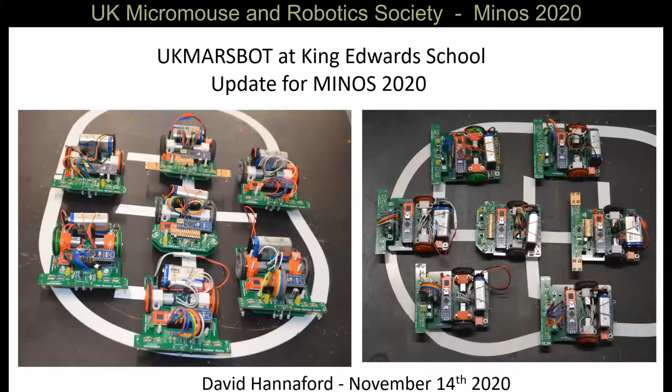So this is basically a quick update on what we've been doing at King Edwards School in Stratford. So as you can see from the front slide, we've been building lots of UKMARSBOTs, which is great news.

We met every Tuesday after school for an hour and a half with 10 pupils from Year 8 building line followers. And we had a couple of helpers from Year 11 who in previous years had some Arduino line following experience as well, with previous robot clubs I'd run there.

So just over a year ago, we started the idea of building UKMARSBOTs with the Robot Club. And then between then and December, we were doing both hardware builds and also in parallel getting people used to the Arduinos, because most of them had never done any Arduino programming before.

From January through to March was improving the line following code and testing and trying to improve it. But we also have a 5-meter drag race strip. So we spent quite a bit of time doing drag race as well, because I found that quite good fun. Then, as we all know, middle of March, lockdown came. So nothing happened basically through the whole of the summer.

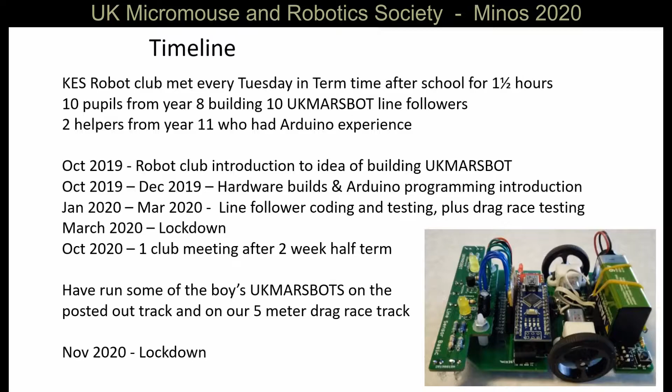We were working in the design and technology lab, where we had a laser cutter and some 3D printers, and we used the 3D printers to make the wheels and the rear skids. We had 5 soldering iron stations, but 10 people building robots. So in each session, we had 5 people building robots and 5 people getting used to Arduino, and then halfway through, we'd swap over. I think they all really enjoyed the soldering, as it was new to most of them.

We had 10 desktop PCs in the DT lab, and we managed to get Arduino loaded onto them, including the CH340 driver that we needed for the Arduino Nanos. And I also set up a website with the build instructions, some Arduino advice, and some little bits of sample code.

In terms of the builds, we used the Pimoroni 20-to-1 geared motors, which basically gave us more top speed than they could control. So we didn't actually need anything faster than that. We didn't put encoders on because it was going to be complicated, and we thought we'd get the basics sorted first, and it was expense as well. We were using visible light sensors for safety, and we used O-rings on the tires for the printed wheels. Okay.

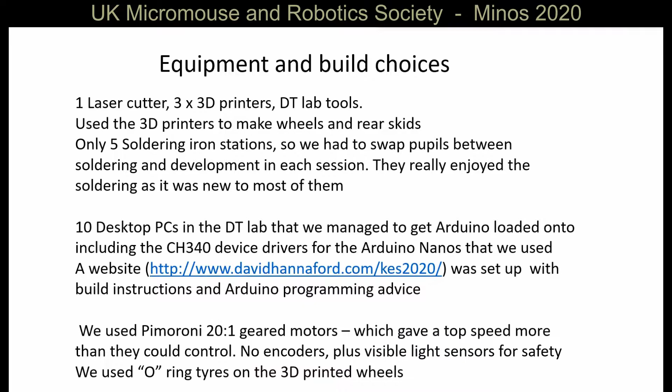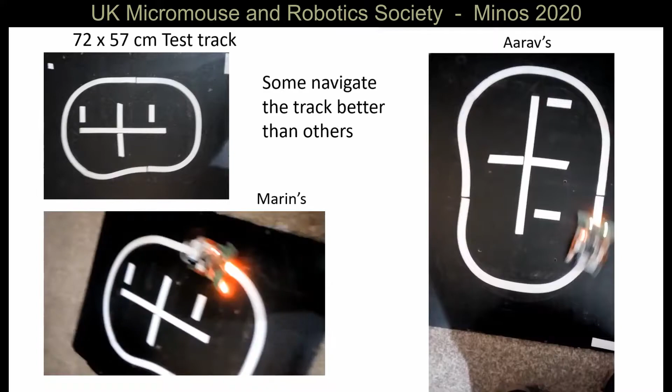We didn't have a big track to try things out at the school. We had some blackboards that we put some white tape on, and the boys liked ripping the tape off and putting different tracks down. But basically, we used a small 57 by 72 centimeter track with just a circle and some lines on it, just to try things out. Some went around that reasonably well once they'd been built, and others not quite so well, which is about what we'd expect.

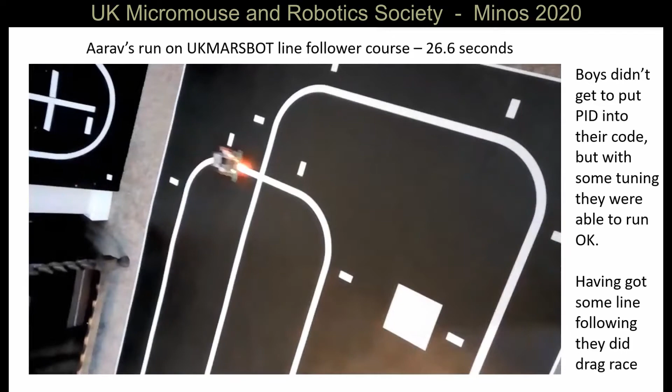Once we got them running on that, we did go on to do stuff with drag race. But here's a shot of one of the better school line following robots running on the track that Duncan has sent out. And as we can see, it follows the line nicely. It does the crossovers pretty well, and even the tight bends, it's following the track round pretty well.

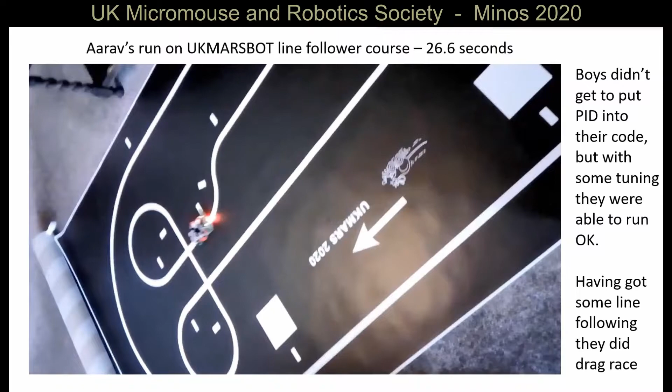It didn't do full PID control. I think there might have been a little bit of proportional control in this one, but that was about it. But in spite of that, the best ones, with a bit of tuning on the speed and not trying to run too fast, got around the track pretty well.

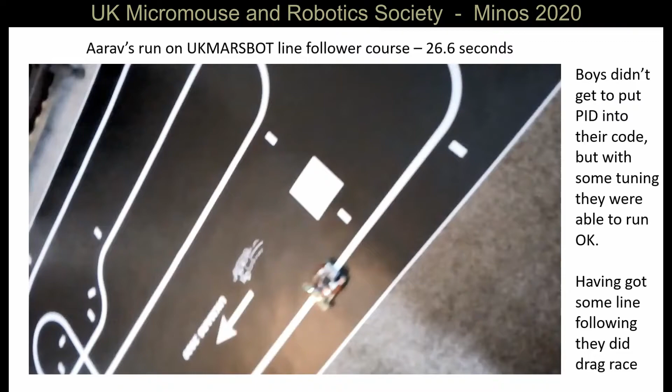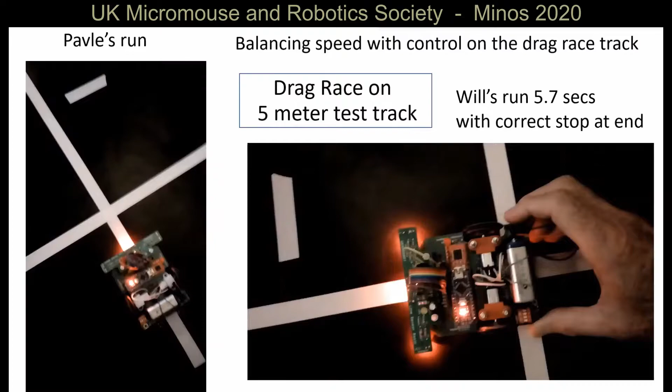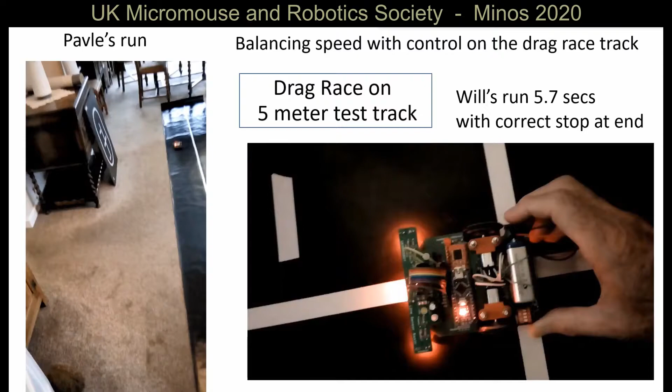So once we'd done a bit of line following, we went on and tried a bit of drag race type stuff as well. And again, here's a couple. This one, he was trying to go a bit too fast and wouldn't quite stay on the line. There's always a question of balancing speed with control on the drag race track, especially since our track is actually a Teflon track, so it's pretty slippery. So you needed to be controlling it well to keep on the line.

Here's a slightly better one. In fact, this is one of the best ones. This one actually goes right the way down to the end at quite a decent speed, and stops correctly at the end as well. It took quite a bit of work to get them to work out how to do the stopping at the end and sort all that out, but a few of them managed it, which was good.

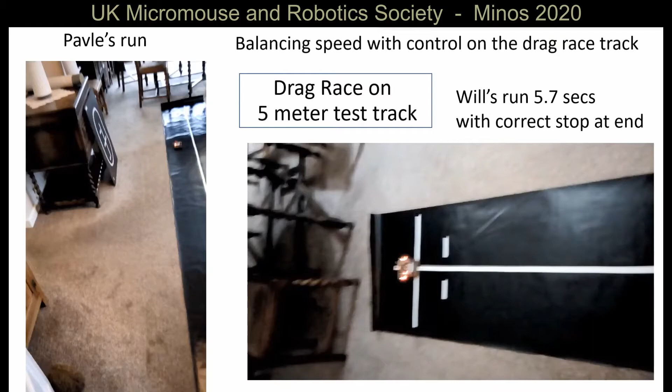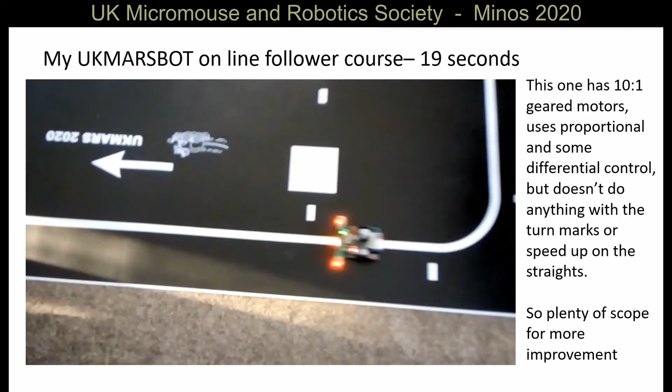So in terms of the one that I built, because I built one as well as all the 10 being built at school, in fact I built a couple. I built one with the 10-to-1 geared motors just to see what it could do, and I put some proportional and differential control on it, but it still at this stage wasn't using encoders, and although it has the extended line sensors on it, it's not detecting those and trying to use those to go faster down the straights or anything like that. But again, nice smooth run.

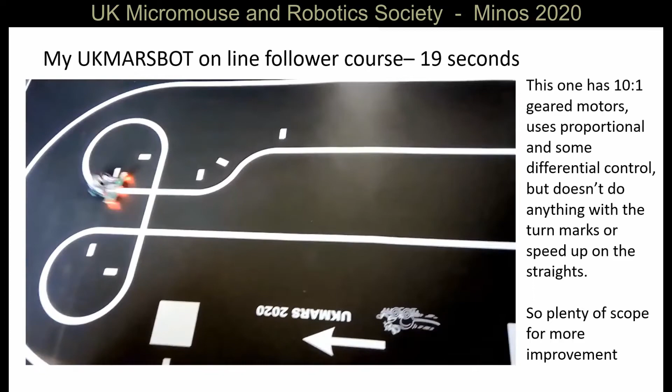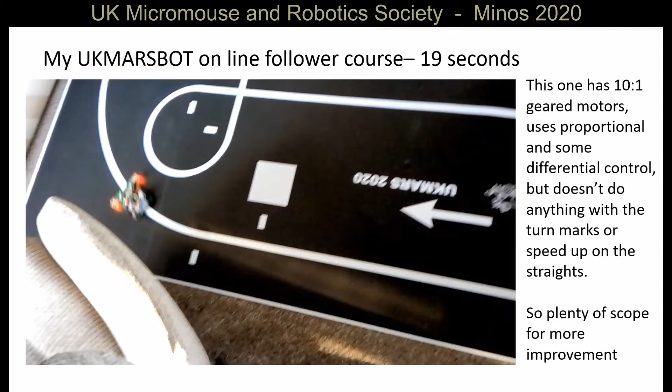I don't know how it's showing at your end, but at my end, this is a really smooth run around the track as it comes back round. And again, it's a little bit faster than the ones from the pupils at school. It's around the track in 19 seconds, but there's still plenty of scope for more improvement, running it faster, and particularly doing the use of the radius markers to decide when it can go faster and when it should be going slower.

In terms of some of the issues and problems we had, the Arduino software, you have a couple of options when you're loading up the programs, and with quite a few of the Nanos we had to use the old bootloader option, which presumably means it had some slightly different bit of hardware on the Nano itself that was reading the stuff coming in from the USB, but we managed to sort that out. But it did mean that whenever you plugged one in, quite often you would try and load it up and it wouldn't, and then you'd think, oh well, I'll try this one with the old bootloader, and it would usually work then.